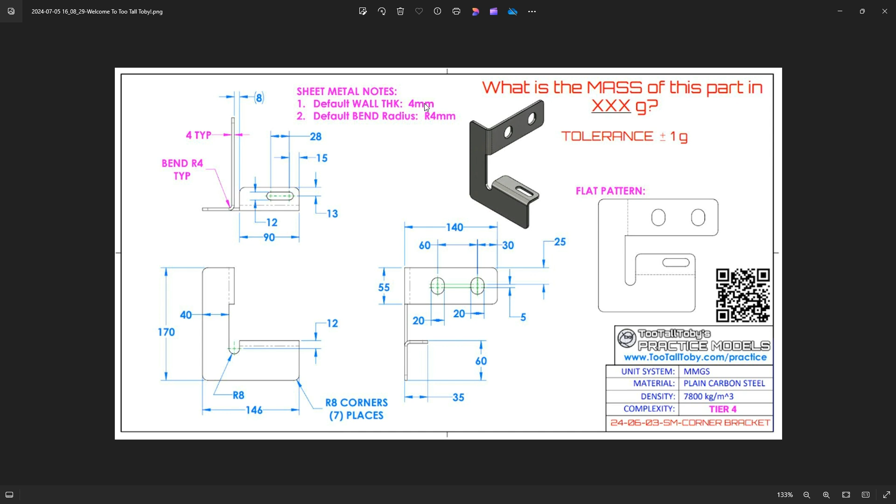And then the rest of the geometry just has additional spacing here and some shapes that we need to do for our slot features. We do know a default thickness is 4 millimeters and our radius is 4 millimeters. So let's go ahead and hop over to IronCAD and we'll show you how this is done.

So in IronCAD we have our standard starter catalog, and there's a sheet metal folder inside of there that you can double click on or drag and drop the folder out to use. You can also go to more catalog and sheet metal if you like to use that catalog. They're the same ones, but either one will work.

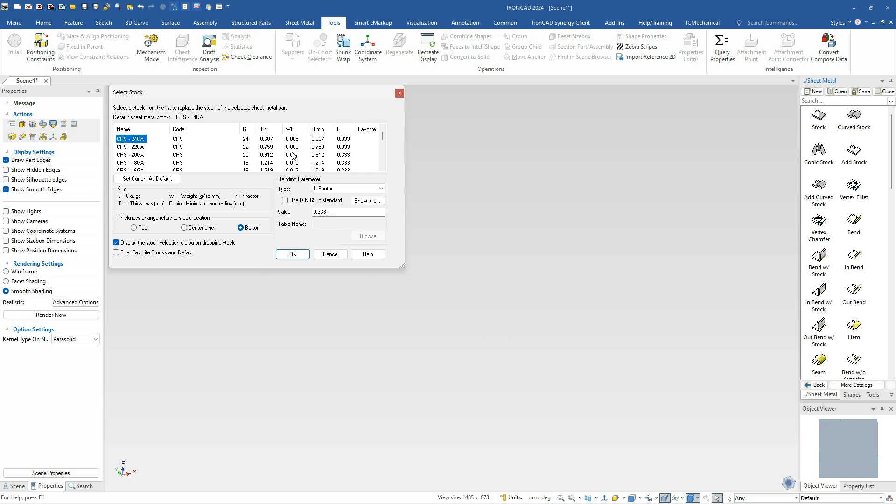So we're just going to use our default starter catalog and hop into here, and I'm going to drag and drop a stock out, and it doesn't really matter what I select here since I'm in imperial units. This is going to be the wrong stock table. I can put a different stock table in there with the right values, but either way we're in millimeters, so we're going to just go to the part properties of this guy and set it to 4 millimeter thickness and 4 millimeter minimum bend radius. So that gives us our default settings.

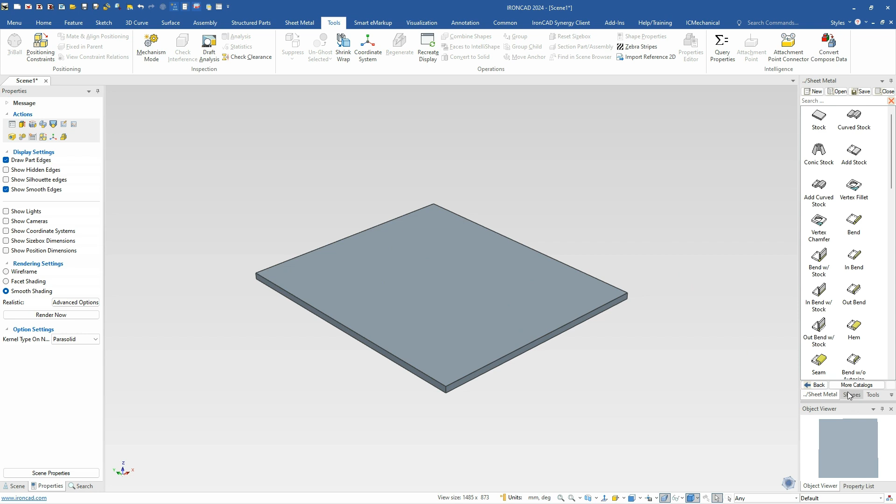Now we know that overall length of this is 146 and 170, so we can just type in those two values to get that. Next we can go over to our shapes catalog, or hit back and go back into our starter catalog, but we can go over to our shapes catalog to grab a cut shape. So we can mix and match sheet metal and regular shapes. So we're just going to line this to these two edges here.

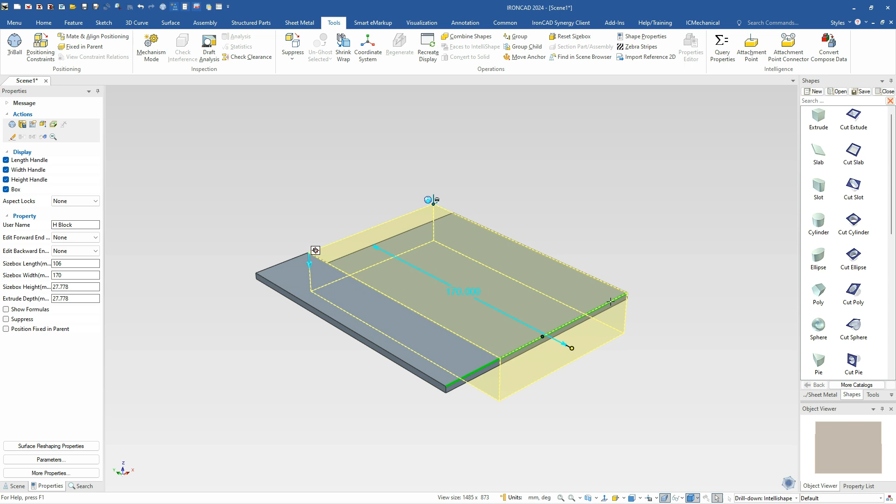And we know that this, when we line this here, has a value of 146 minus 40, so it's a 40 millimeter offset. And this bottom side, we know from here to the top, it's got to be minus 60 on that is where the bend needs to be. But we also had to add on 12 millimeters for where our center cut is. So we're just going to take that value again and add 12 to that. So that gives us the location for that starting geometry.

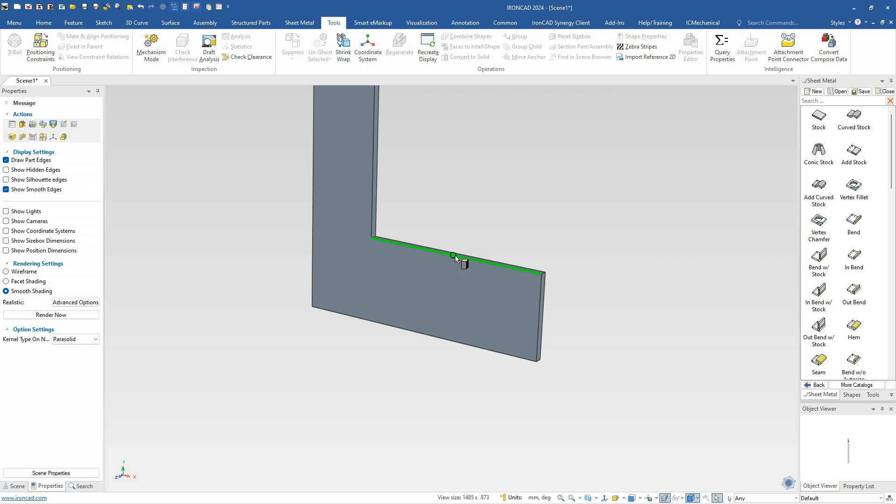So let's go ahead and start on this area here. We'll go back to our sheet metal and drag and drop a bend shape, and we can drop on either edge. If you drop on this back edge, it'll go away from us. This one will come in front of us, but there's always an arrow here that you can toggle that. So either way is fine.

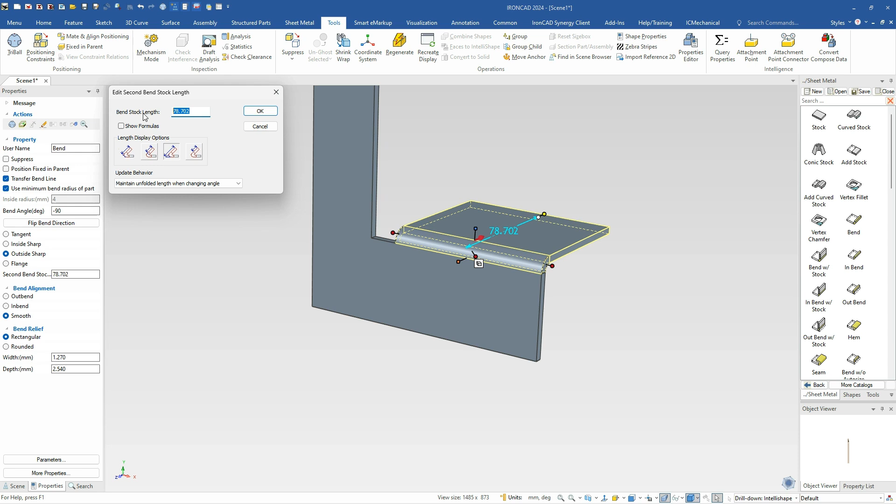So we can just move that over, and what we know is the width of this needs to minus that width of our hole, which is 16 diameter there. So we'll go ahead and get that offset. And we know this has a value here. If you double click on it, you can see I currently have mine set up to do outside sharp. So I can type in the value there to be exact, which is, let me double check that, 35 for that value. So we'll move that 35 from there. Now we need to move this to 16.

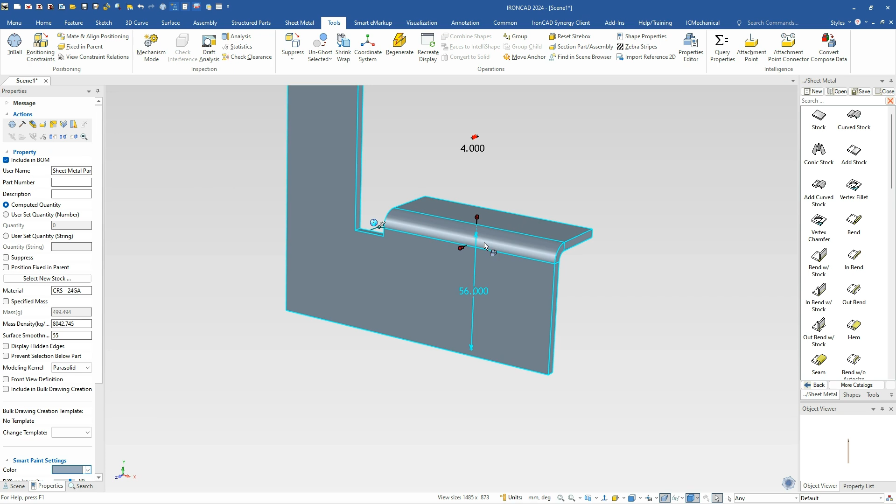So if we look at this distance, we have two handles. We have our feature handles, which modify just the feature itself, or a part handle actually can move the bend and the stock. So one of the things we can do here is right click on that and say add a distance from point. And we can see by default it's 56 because we moved it down 12. So this handle allows us to move the stock, which we need to be at 60 from that top face. So it'll actually move this bend up and add stock to it, which gives us that extra material that we need there.

So next we can go ahead and drop our shape. Again, we can hop over to our other catalog, type in our value of 16 for that, and use the TriBall. I'm just going to position it right there on that center point of that edge to get us in the exact location. So that gives us our cut there. So that is a very easy way to do that in IronCAD. Again, we don't have to do any cross sections on that.

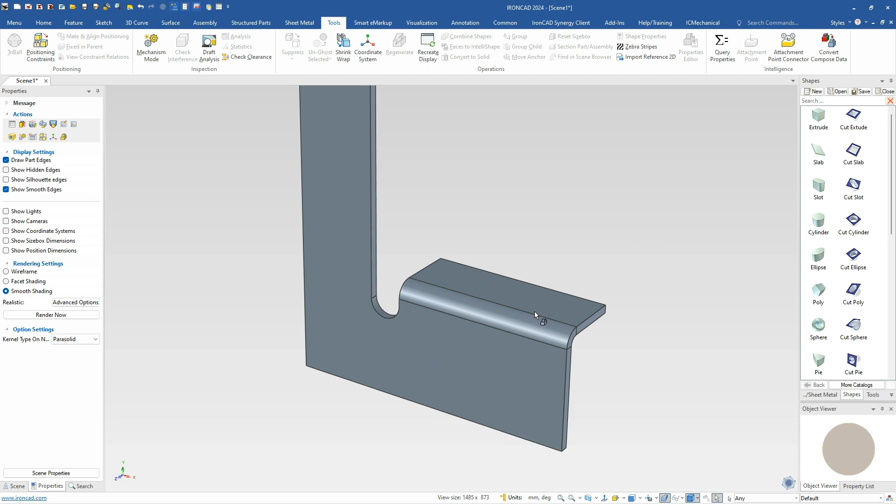Last, we'll go ahead and put this obround on here, or we call it obround in here, but it's actually just a slot feature.

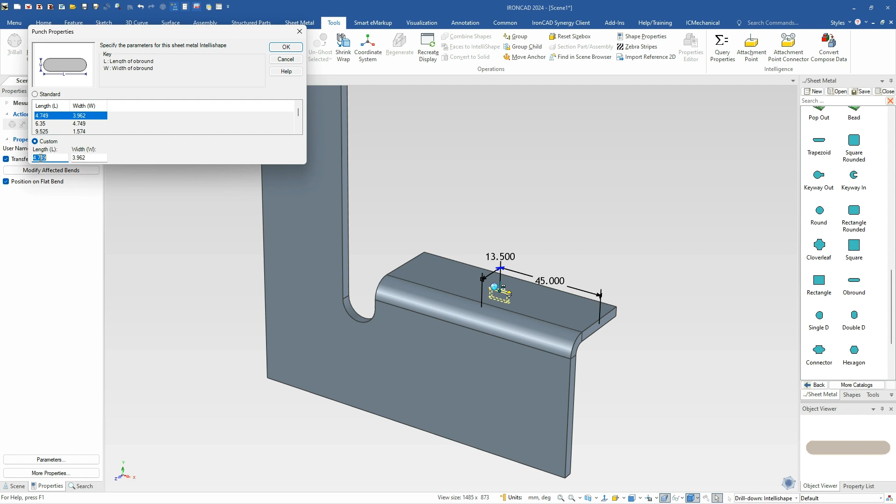I can just drag and drop that out here, and I'm going to use the TriBall. I'm just going to turn it around 90 degrees here, and then we can right click on this little arrow here and go to tooling properties. So we know the value of this slot feature has got a total of, let's see, 28 plus 12. So that's going to be 40 for that, and it's going to be 12 for the width. We can go ahead and type that in, and then we can use the TriBall to position this.

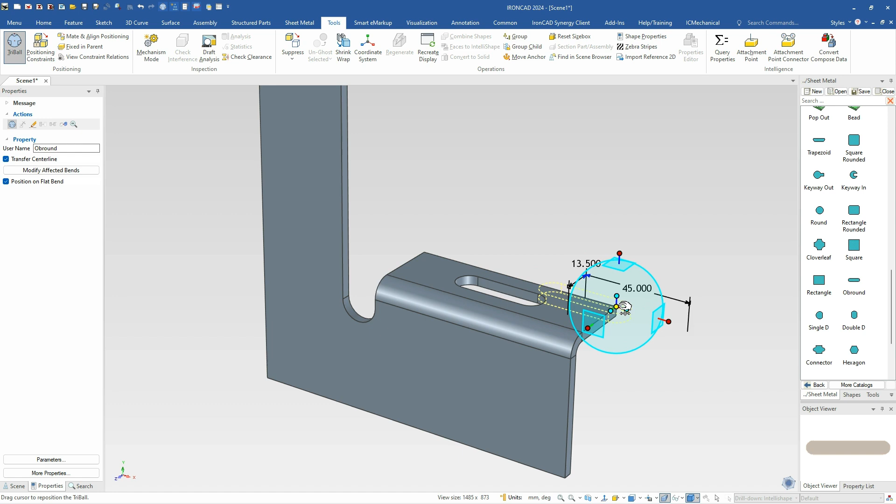And we know all the dimensions are from the center point of this side. So I'm just going to hit the space bar, hold the center point and my shift key to get to that center point there. And I can hit my space bar again. Now I'm on that center point, and now I can use that as a reference. Instead of using dimensions, I can just use the TriBall to drive this. So I know it needs to be a value of 15 millimeters from that, and it needs to be a value down. I could use the planes to do this as well, but we'll just use two handles here and do 13 for that. So that gives us our positioning for that shape.

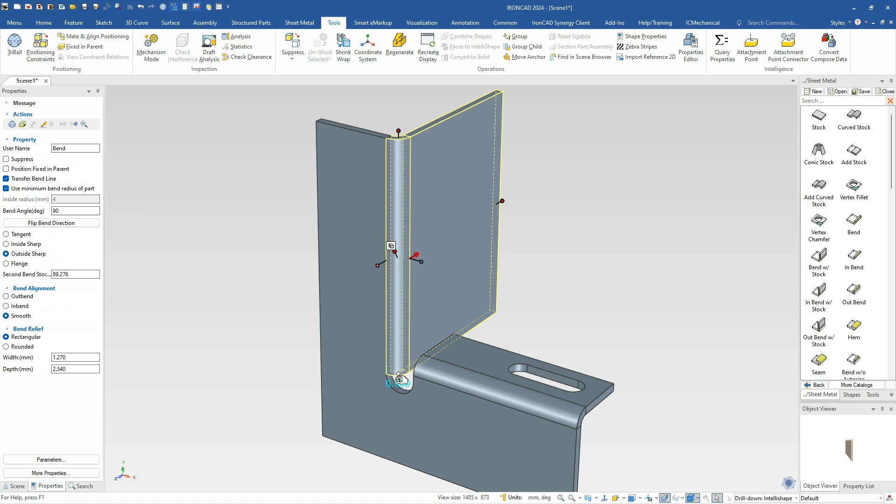Next, we'll do our bend up here. So we'll go ahead and drag and drop a bend. Again, I can drop on this side to get that to move out that direction, and we know that this has a value of 55. So we'll just double click on that, type a 55 for that. And we know this value here is going to be 140. Again, it's from our virtual sharp here. So we know it's a value of 140. Let me double check that. Yeah, 140 for that.

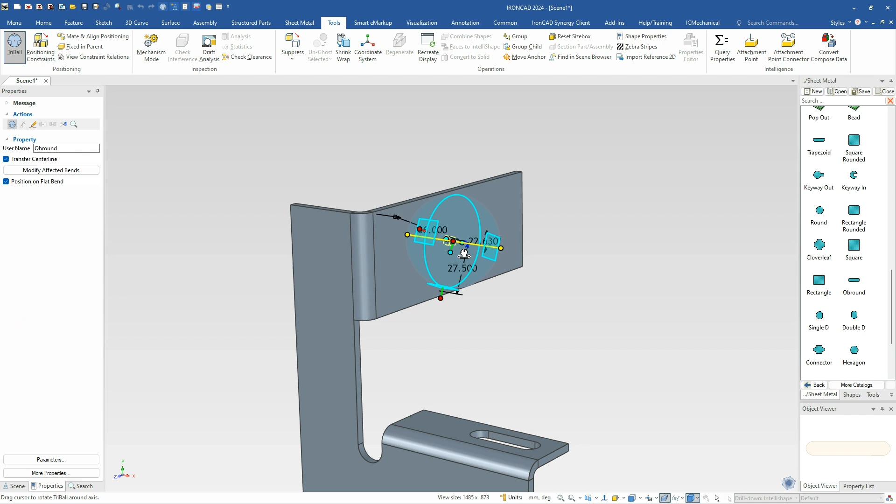Okay, next we need to drop again that same shape in there. So we'll scroll down our catalog. We got that obround. I'm just gonna drop it in the center. It doesn't really matter. Again, I'm gonna rotate it around 90 degrees. And again, we can go into these tooling properties. And in this case, it's going to be a 25 for that and 20 width for that. So that's a simple way to do that. And oops, I forgot to apply that. There we go.

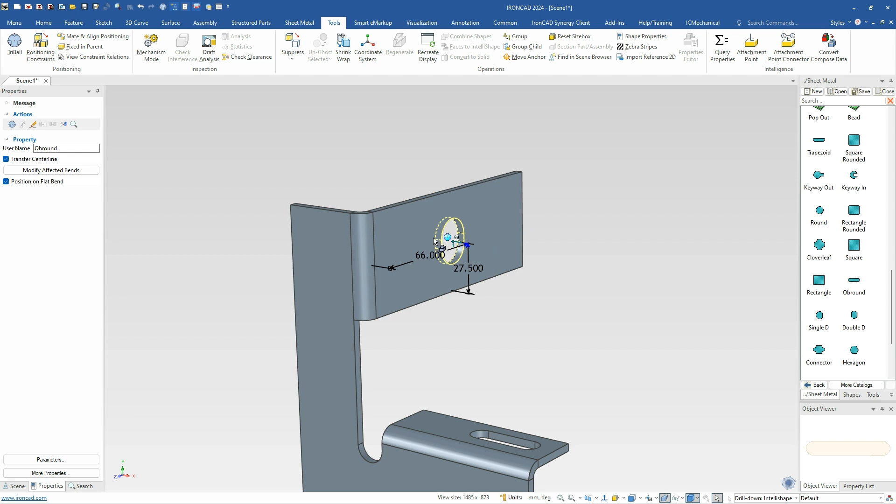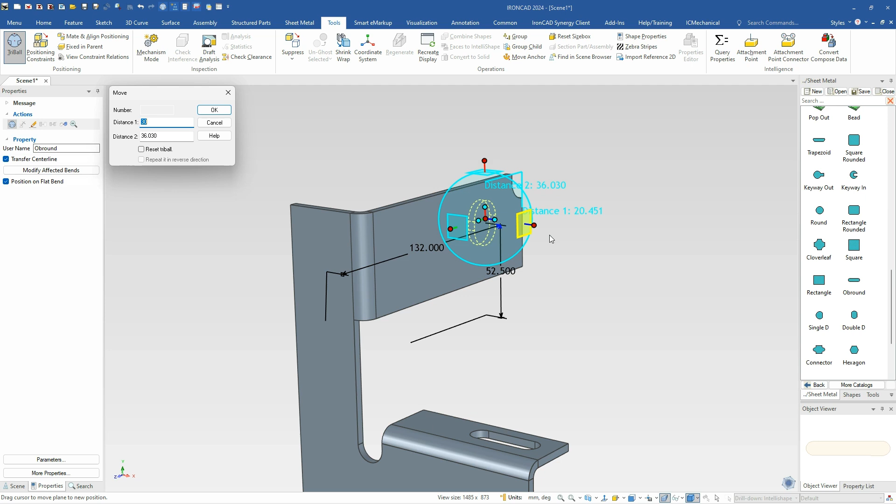Now we can do the same positioning in here. It's got the same reference location again from the center point of this top arc. So we'll use the TriBall again, do that same process, hold the shift key down, put it there, move it over to the corner. And to do this, you can do that with handles or you can do it with this plane, so we know it needs to go over and down. So we can type in those values. That value again is 30 from the top edge, and distance one is actually the down one. So the down one is actually 25. The distance 2 is 30. There we go. So that's just to give you an idea how to position that using those dimensions.

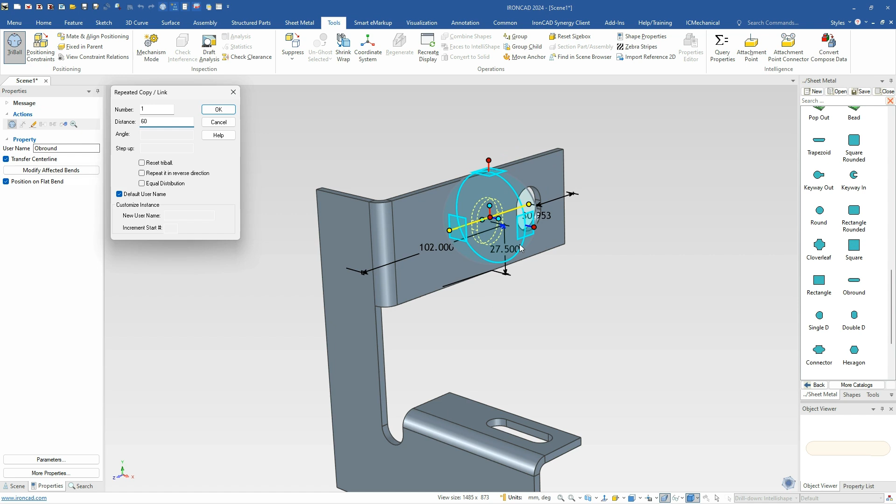But if you want to check it, you can always right click on this, edit distance from point. There, that gives you the 30. The other one will be 25. And then we want to make a copy from here. We're just going to right click and drag, make a linked copy of that, and that has a value of 60 from the center. A simple way to do that. So now we've got those two shapes. I've got everything on here.

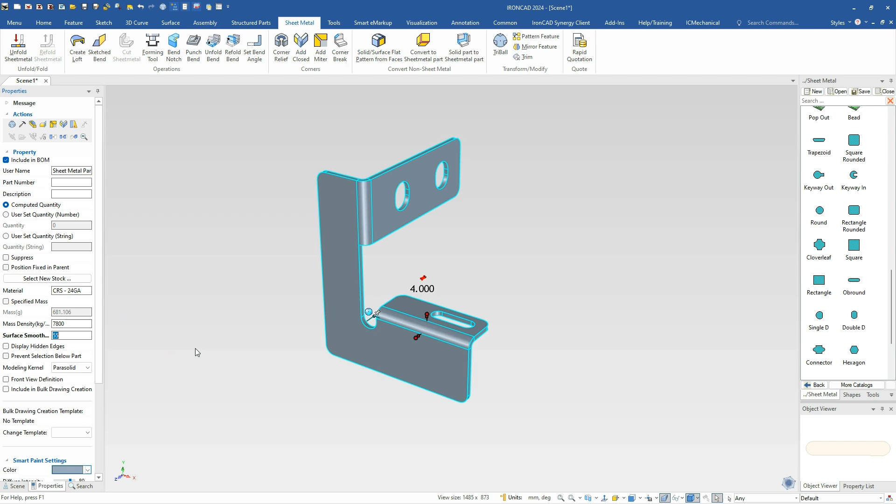The last thing we need to do is all the edges need to have a blend on them or a corner break. So we need to select our corner break tool in the sheet metal, select our part, and we want that to be 8 millimeters. Double check that. Yeah, radius of 8 for all the places there, and hit OK, and that will apply it to all corners for us. And now we can look at our part. It has a mass density in this case of 7,800, and that gives you 681.1 for our mass.

And you can also unfold this if you like. Just right click on the sheet metal part and hit unfold. That will give you your flat pattern, and we can fold that back up just by right clicking again. You can also access that by hitting your S key on your part. The fold and unfold are sitting right here, so you can unfold it, hit your S key, fold it back up. So there you go.

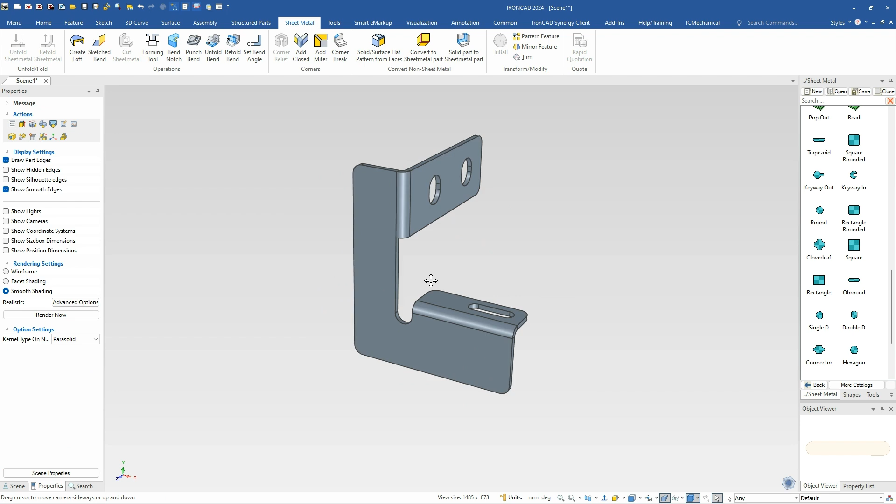That's a simple way to build this one in IronCAD sheet metal design using the handles. We use handles on our regular shapes, for example that cut shape there, and we also use the bend part handles and feature handles to drive and modify this geometry.